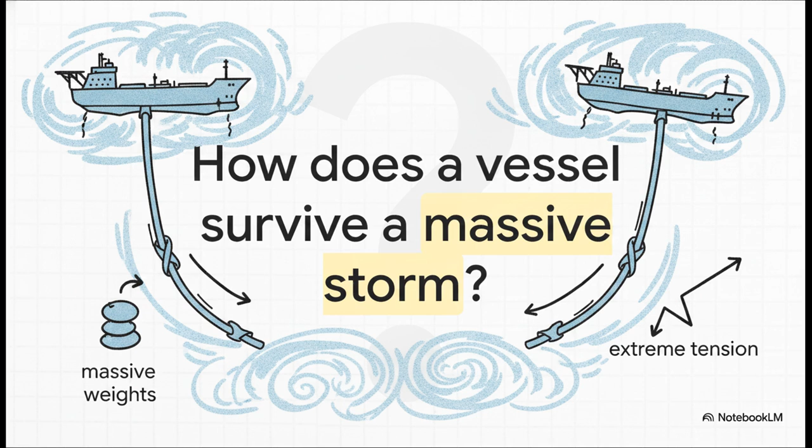Think about this for a second. What is the ultimate macro problem here? How do you hold a floating skyscraper, an FPSO vessel, perfectly in place without snapping its vital connections, especially when it's being hammered by the sheer, unbridled fury of a 100-year storm? It's an incredibly complex balancing act of enormous weights, extreme tension, and precise fluid dynamics.

To answer that, we're going on a bit of a deep dive. First, we'll look at mastering the mooring problem, then the specific components of deepwater mooring, and how turrets and swivels enable a neat trick called weather vaning. After that, we'll cover safe offloading with CALM buoys and wrap up with risers and flow assurance. Let's get right into it.

Section 1. Mastering the mooring problem. Let's start right at the foundation of the whole operation, the physical tethers keeping the ship from floating away. Look at the setups we typically use to tie these ships down. You've got static spread moorings, where lines essentially anchor out in all directions to lock the ship in a fixed position. But contrast that with the dynamic genius of single-point moorings, or SPM, where all the anchoring lines converge at a single point, like the bow or an internal turret.

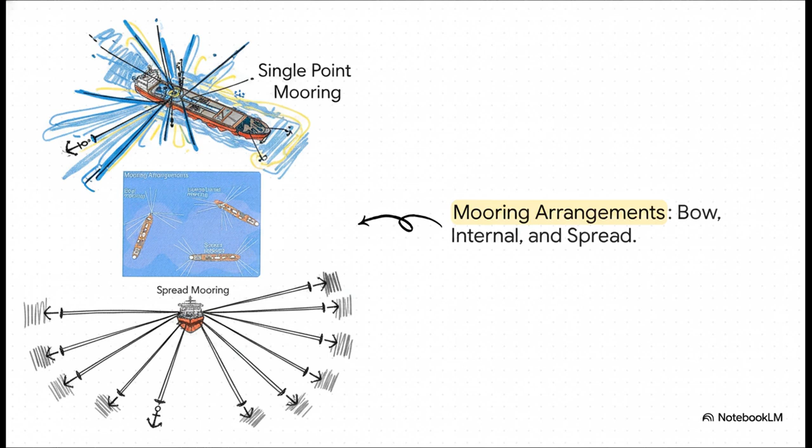This brings us to a really crucial concept called weather vaning. By tethering the vessel at just one single point, it is totally free to rotate, exactly like a wind vane on a roof. The ship naturally swings its bow to point directly into the oncoming wind and waves. This is a massive deal because it dramatically reduces the environmental forces battering the hull and takes a huge amount of stress off the fragile risers coming up from the seabed.

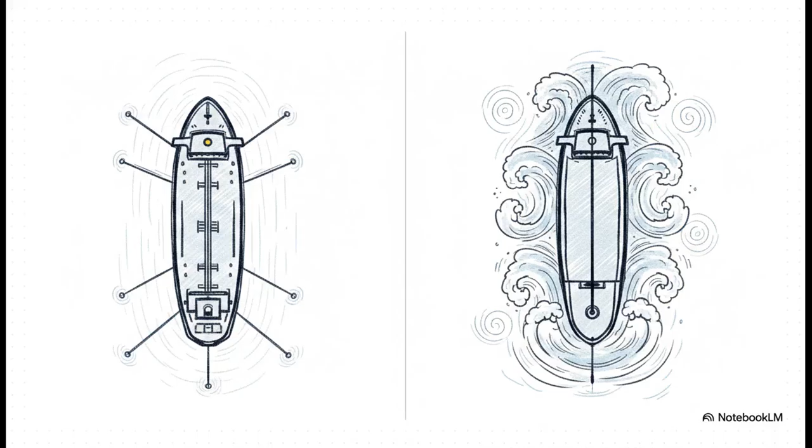So, why choose one system over the other? It literally comes down to geography. If you're drilling in deep but mostly calm environments where the weather is unidirectional, places like West Africa or Brazil, a spread mooring is cost-effective and does the job perfectly. But what if you're in the North Sea? Out there, violent storm directions change seasonally. A fixed ship would just get torn to shreds. For those harsh environments, a single-point mooring turret system isn't just an upgrade, it's absolutely essential.

And you know, the engineering design standards for these tethers, specifically the API Recommended Practice 2SK, are totally uncompromising. Engineers have to design for what's known as the intact -1 condition, meaning if the unthinkable happens and a mooring line completely snaps during a 100-year storm, the remaining intact lines must still hold that ship with a minimum safety factor of 1.25. Imagine your car's parking brake still holding your car perfectly even if half its cables were suddenly sliced in half. It is that level of over-engineering.

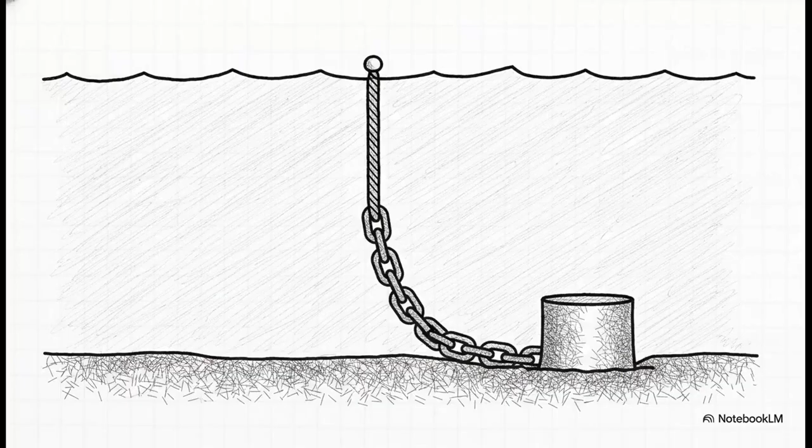Moving right along to Section 2, Components of Deepwater Mooring. Let's look at the actual hardware required to pin this massive ship to the seafloor. A deepwater line isn't just one long, heavy chain. It's a clever composite system. At the very bottom, resting on the seabed, you have a heavy 120mm studless chain. That sheer weight creates a curved, catenary shape that gives the line a spring-like restoring force.

But if you use solid steel all the way up through thousands of meters of water, the sheer weight of it would literally sink the ship. So for that massive middle section in the water column, they swap to lightweight polyester or wire rope. And finally, it's pinned into the earth using giant anchors, often these massive steel cylinders called suction caissons that practically vacuum themselves into the soft, deep ocean clay.

Okay, Section 3, Turrets and Swivels. This is where the stationary ocean floor meets the spinning ship, and it is fascinating. If you look inside an internal turret, there's a central yellow cylinder that is completely locked down to the seabed by those mooring chains we just talked about.

It does not move an inch, but the purple structure around it, which is the hull of the ship itself, rotates freely around that central cylinder on these colossal heavy-duty roller bearings. Keeping the turret internal like this totally shields the crucial connections from wave impacts.

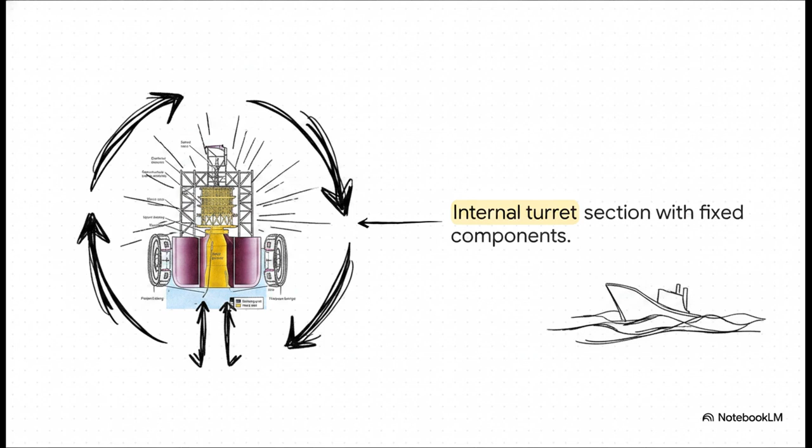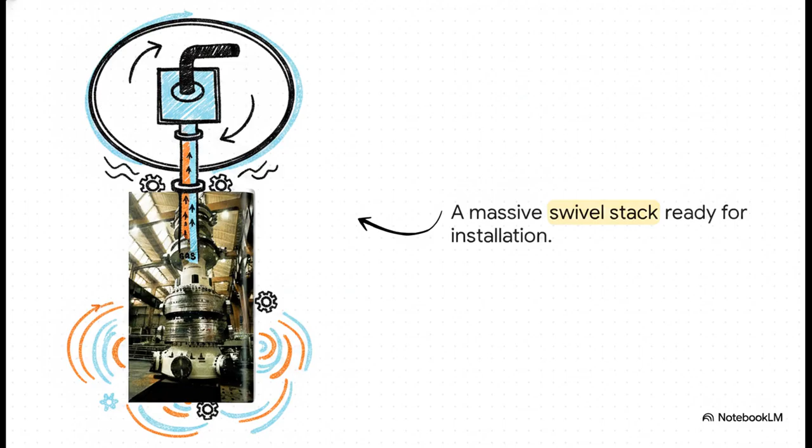But here is the ultimate billion-dollar engineering puzzle. While the ship is constantly spinning around that fixed turret, it has to continually suck up high-pressure oil and gas. How on earth do you pass fluid from a stationary pipe into a constantly spinning pipe without just twisting it until it bursts? The answer is this absolute beast of a machine, the swivel stack. Sitting right on top of the turret, this towering stack uses an incredibly complex series of high-pressure rotary seals to route multiple fluid streams at the same time.

Think about the intensity here. You've got production fluid rushing in at 200 bar and gas being injected at an insane 400 bar, which is like the pressure you'd feel 2.5 miles underwater. This stack has to channel all that pressure, plus water, methanol, and electrical signals, spinning 360 degrees non-stop for 20-plus years without leaking a single drop. If a swivel fails, the entire production of the ship is done.

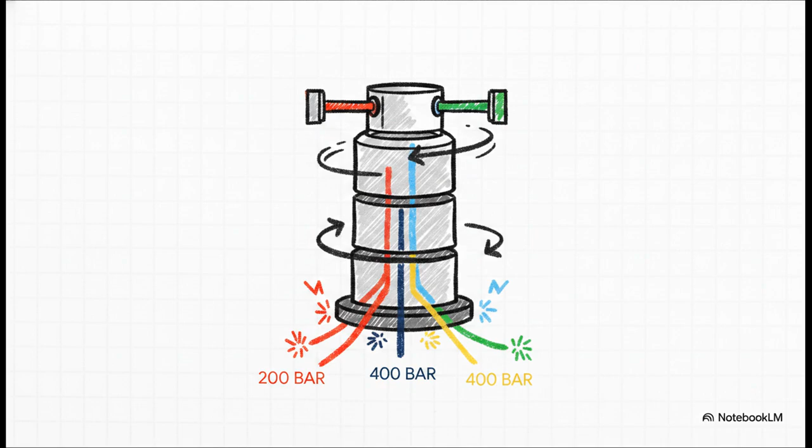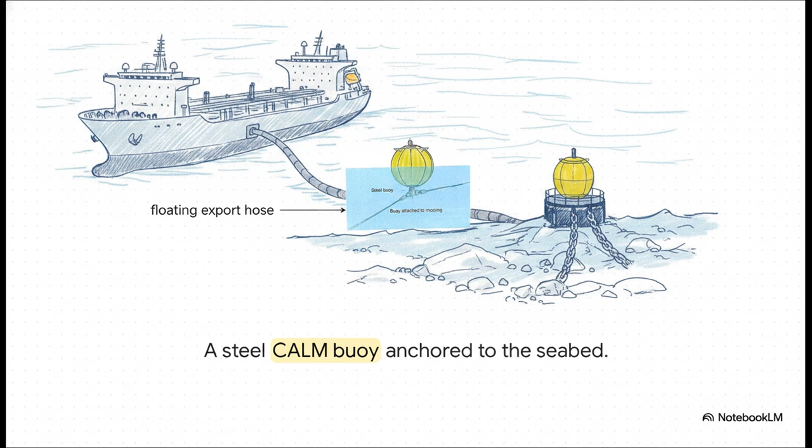Section 4. Safe offloading via CALM buoys. Now that we have all this highly pressurized, processed oil on board, how do we safely hand it off to get it to market? You definitely don't want a massive transport tanker bumping into your billion-dollar processing ship in rough seas. So the industry relies on a catenary anchor leg mooring, or CALM buoy. It's a large steel buoy permanently anchored to the seabed a really safe distance away from the main FPSO, connected by a floating export hose.

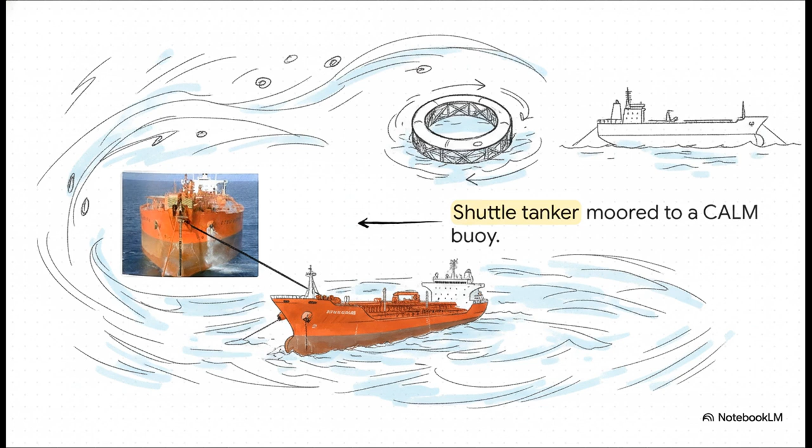So when a shuttle tanker rolls up to collect the oil, it doesn't even get close to the main ship. It just moors right at the CALM buoy. This setup is a total game changer because it allows the shuttle tanker to safely weathervane independently from the main vessel. Because they aren't directly tethered to each other, they can safely keep offloading oil even if there are 50-mile-per-hour winds and 18-foot waves.

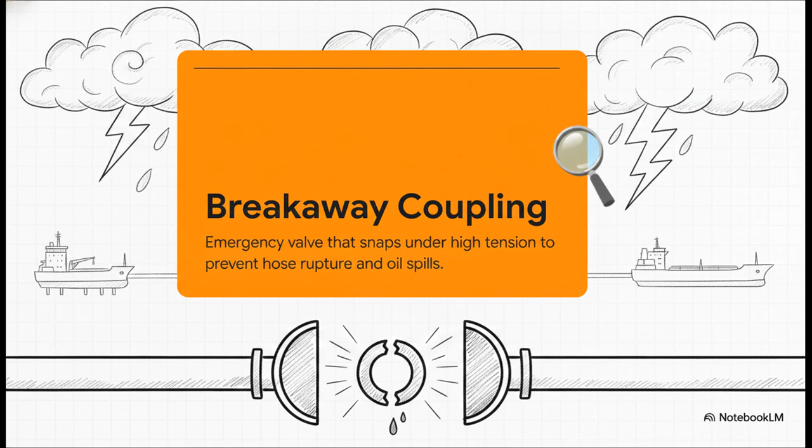But storms happen, right? What if the tanker drifts too far? Inside that floating hose is a brilliant failsafe called a breakaway coupling, with the Gall Thomson design being the industry standard. It's held together by precision-engineered titanium bolts. If the tension goes past a safe limit, those bolts snap automatically. The split second they break, internal sealing petals slam shut on both sides of the hose. A few drops might spill, but you entirely prevent a catastrophic high-pressure oil spill.

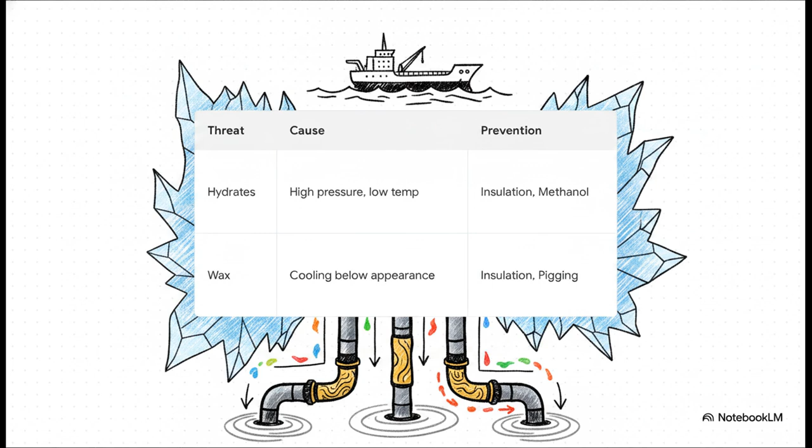Finally, Section 5, Risers and Flow Assurance. Let's zoom all the way back down into the dark water to check out the deep-sea veins of the operation. Before the oil even begins its journey up, engineers have to solve what's called flow assurance. Down on the seabed, the pressure is immense, and the temperatures are basically freezing. Under those extreme conditions, water and light hydrocarbons can instantly form these icy crystals called hydrates, or waxes can solidify, literally plugging a pipe solid in a matter of hours. To fight this, they constantly pump down thermal insulation and chemicals like methanol to ensure the crude keeps flowing smoothly.

And when that fluid does travel up to the wildly bouncing ship above, it can't just be through a straight, stiff pipe. That would tear apart immediately. So engineers use flexible, layered pipes arranged in deliberate slack shapes. Depending on the depth and the waves, they might use a free-hanging catenary shape, or they attach buoyancy modules to force curves like the steep S or lazy wave. These specifically designed curves act exactly like massive subsea shock absorbers.

It's really something to see. You've got this beautiful synchronization in the subsea network where these flexible risers gracefully snake their way up from the ocean floor to the turret. It's a perfect marriage of advanced polymers and metallic engineering, built specifically to roll with the ocean's unbelievable, unpredictable power while feeding the ship non-stop.

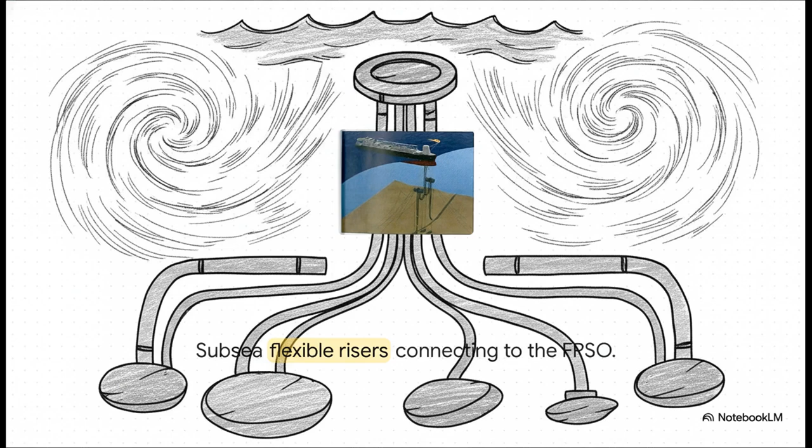Which leaves me with one really fascinating final thought. We figured out how to master the 100-year storm today using things like precisely tensioned chains, spinning swivel stacks, and breakaway valves. But as global demands push our energy production into even deeper, darker, and crazier oceans, what kind of extreme engineering are we going to have to invent next? How are we going to tether tomorrow's floating giants? It's going to be absolutely amazing to see.